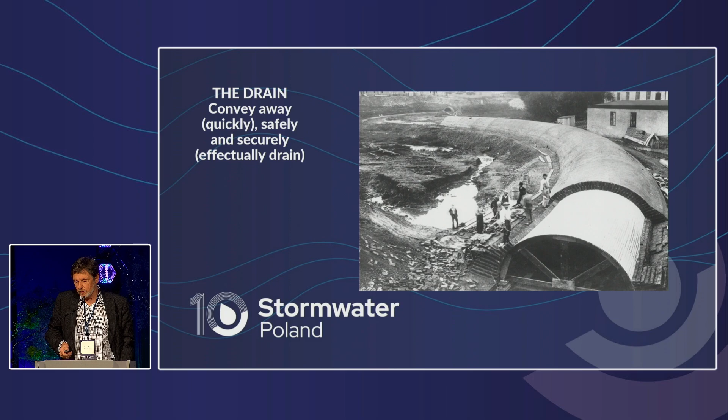Stormwater is a Cinderella in the urbanism landscape. Most politicians are only interested in it when it causes problems. Increasingly so, but still, actual genuine attempts to tackle issues to do with stormwater are few and far between amongst our governments and even the institutions charged to manage it.

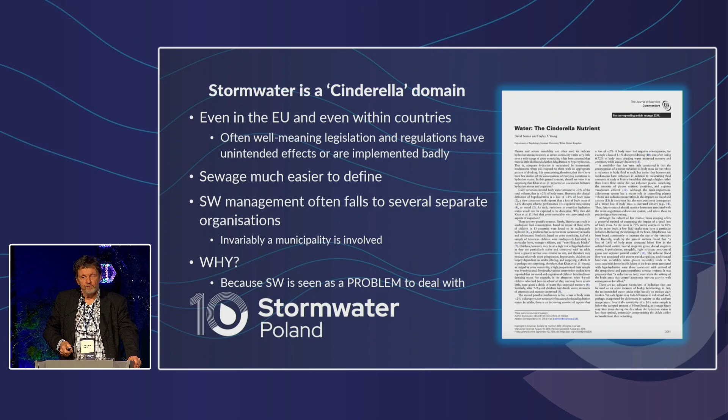Even within the EU, stormwater is not seen in the same light as river flooding. Sewage, of course, is much easier to define. It's heavily polluted, and stormwater is shared between different organizations in terms of its management. And it's very dependent on urban planning. So it's also seen as a problem rather than an opportunity.

So the journey we're all on, because we're here, stormwater is a minor consideration that we need somehow to raise up the agenda. And suddenly everyone's talking about nature-based systems. You see it everywhere, it's in documents all over the place. But we've still got our legacy of buried infrastructure. We cannot just abandon that, particularly in Europe. And the costs of maintaining it and adding to it, if we so desire, are prodigious.

So we have to move stormwater up the agenda, whether they like it or not, and present it to the governments and institutions as an opportunity. So we need a culture change.

One of the ways in which we need to change is to introduce an adaptive culture. That means trying things and changing. In the Netherlands, for example, the big coastal defense projects are very much about adaptive planning, about doing something, seeing how it goes, and then building on that. We need to try and do the same thing with surface water management.

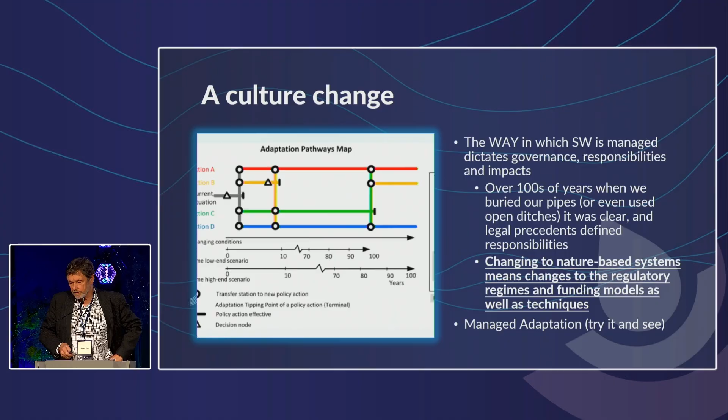Fortunately, blue-green infrastructure is easier to adapt than buried pipes. More of that later. So that physical, technical bit, we can understand. But changing the regulatory regimes, and we had a discussion of that just before lunch, is often one of the biggest obstacles. So what about designing our drainage?

Ulrich earlier showed a similar approach to this one, and this is in one of my co-authored publications on exceedance drainage. What we have are the lower volume events at the bottom in zone 1. We have our design events in zone 2, and we have exceedance events in zone 3. An exceedance event is an event above your design rainfall. In the UK, typically we design BGI systems for a 1-in-100-year event, so it would be something bigger than that. We've then got extreme rainfall.

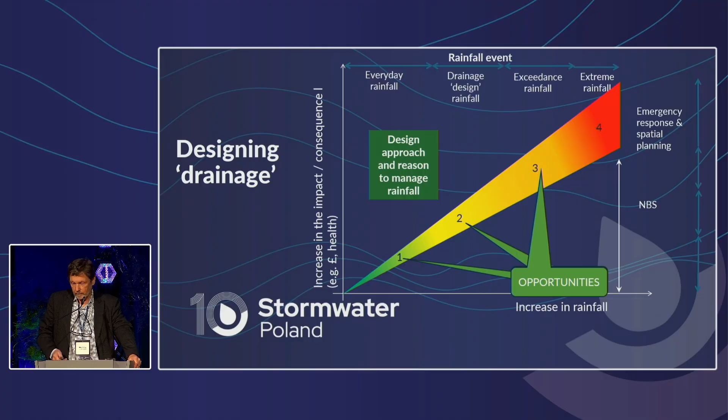In each of these zones, 1, 2, and 3, even when our nature-based system is exceeded, we can utilize opportunities for the surface water. And our resources fit very much in zone 1, where we would look at sequences of rainfall to take the opportunity.

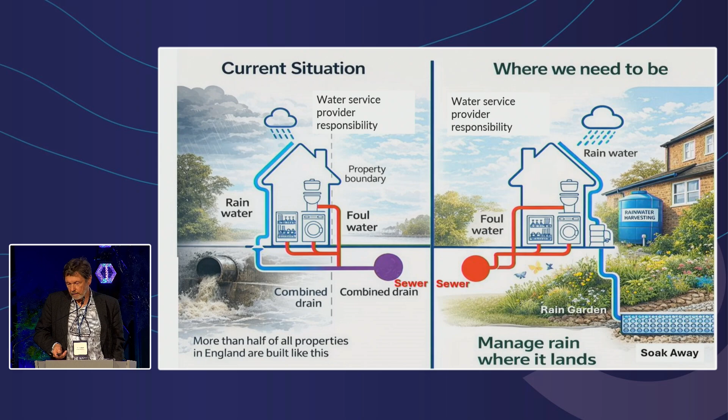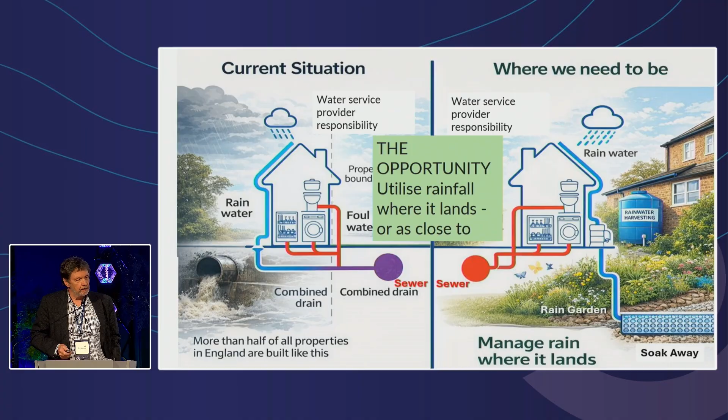Of course, it also goes back to individual properties. And again, we heard before lunch about developers and how developers are often reluctant to change to a system that would actually do with water what the opportunities allow us in terms of resources. And the opportunity, of course, is to utilize the rainfall where it lands, or as close to. So at one end we have that, a domestic system. We also heard about potential for grey water use before lunch.

I want to start really with a couple of slides of axioms. So initially, our planned approach should be to integrate our surface water systems with land use planning and across other systems. We understand that. To cope with climate change, take a managed adaptive approach, which I've already mentioned before, promoting flexibility and diversity of systems. Resilience is very much about diversity.

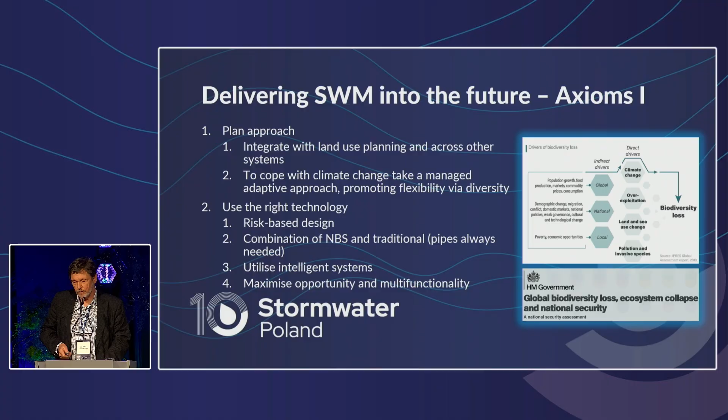Use the right technology in a risk-based approach, which I think we are doing, and a combination of nature-based systems and traditional pipes. We will always need traditional pipes. Utilize intelligent systems and maximize opportunity and multifunctionality.

And it's a cultural change. In my professional life of 60 years, it's been fellow professionals that I've had fights with more than anybody else.

We need to persuade many groups and make business cases, and there's more than one business case needed. Then we need evidence to show performance. Earlier we heard about the need for pilot projects. So we need to get to the point of selling it. We live in a neoliberal economic world, like it or not, and becoming more neoliberal by the day.

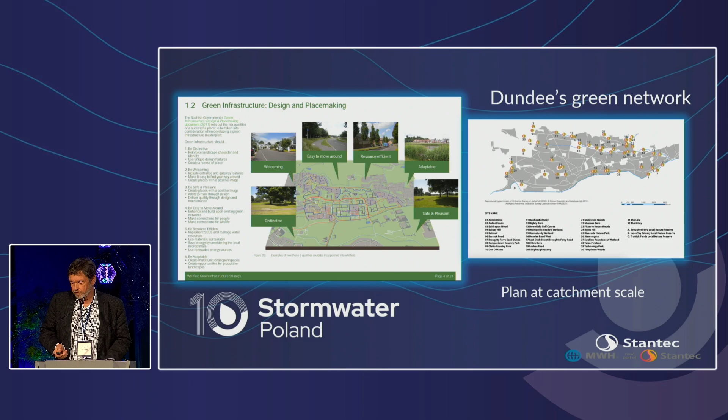So how do we sell this? Well, this is near me in Dundee, Scotland. If we're going to do this, and this is a multifunctional space, we do need the space to do it. How do we do this in dense urban areas? In Dundee, they've got a green network that's interconnected. That's the big plan: install BGI and make sure it's coherent within the planning framework.

So what I'm going to talk about now is economics. We've hardly touched on economics so far, making the business cases. I was involved in a European Interreg project called BEGIN, Blue-Green Infrastructure, which was all about the business case for blue-green infrastructure. And then we're going to touch on whether it is sustainable.

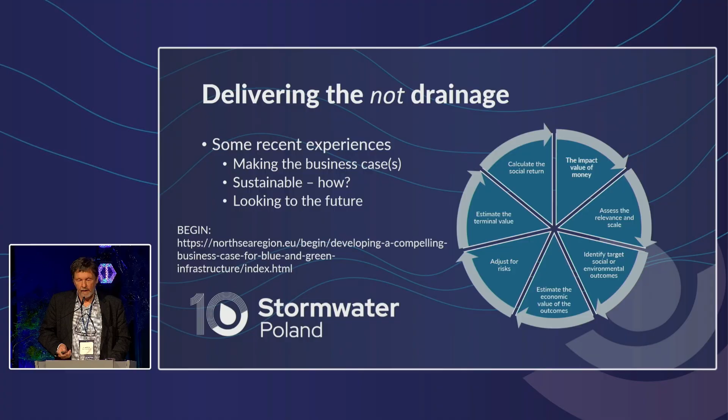If we'd gone back to before, ten years ago, a lot of people would have been talking about sustainability. That is a dirty word now. It's been dropped, people forget about it, but I'll come back to that.

So we need to make the business case and we need to look at cost-benefit analysis. And yes, it's only the Anglo-Saxons that are interested in cost-benefit analysis, as I've been told by the French, that it's only really us Brits that are obsessed with cost-benefit analysis. And that's what I'm going to talk about.

How do we value nature? These are a couple of projects I mentioned: BEGIN, and Enabling Water-Smart Communities, a British project that I was involved in last year. We actually talked to communities: how much more would you be willing to pay for your new house if it was in a green area? And people were willing to pay more.

They had other things on their mind about crime, for example. So obviously in the UK, crime is out of control. And the basis for this is ecosystem services and natural capital assessment.

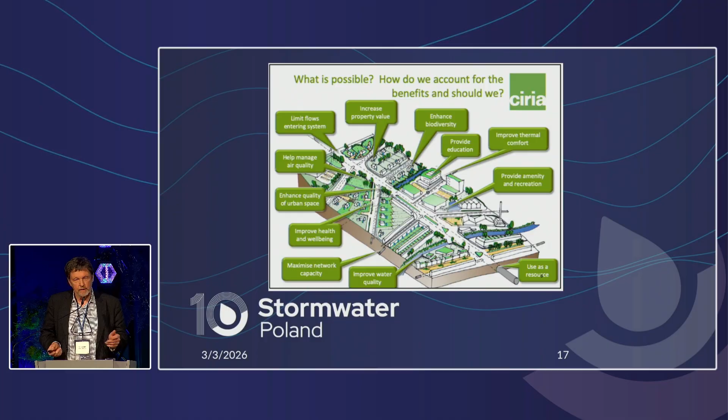There's a whole range of values here. We've heard earlier about increased property prices, obviously water resources, but there are other things like traffic calming. In the US, they build what they call bump outs - rain gardens on the sides of roads that also slow traffic.

So we're going to look at some of these and what they're worth. But before we do that, the first ever application of this concept in the UK was in London, and it was in an area of deprivation, and therefore investments gave a very good return.

The problem was flooding, and there was a local park, but it was flooding adjacent properties. It was decided to invest and look at the value of the benefits that might come from ecosystem services from investments. It was discovered that the benefits of investing £1 were £7, and 93% of the benefits were for cultural services.

So in the ecosystem services categories, there are 4 groups of benefits. Cultural services are far more to do with community value. And this was accepted by the British government as a justification for investment.

Philadelphia has been a path-finding city for doing this sort of stuff, with combined sewer overflow problems. They have approached this as a green city type approach, but not for the whole city. 50% of the combined sewer overflow problems were being tackled by LID, Low Impact Development, or BGI, and this has been underway now for some decades.

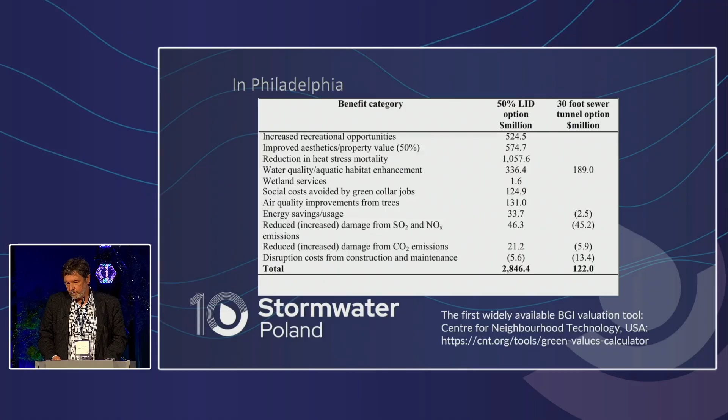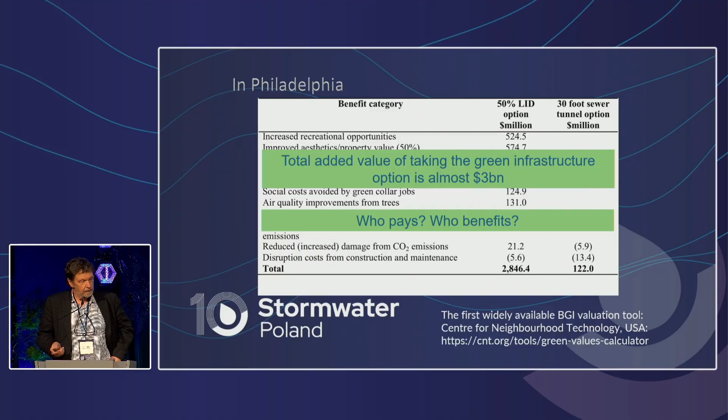And you end up with a total of $3 billion by using blue-green infrastructure as the added value. And all this added value went to the mayor and the mayor's office, because the mayor in Philadelphia was responsible for all of these services. So the justification was very high for this investment. I don't have the costs, but the question then is, who pays and who benefits? The people of Philadelphia are benefiting, the municipality is benefiting, and therefore they should pay.

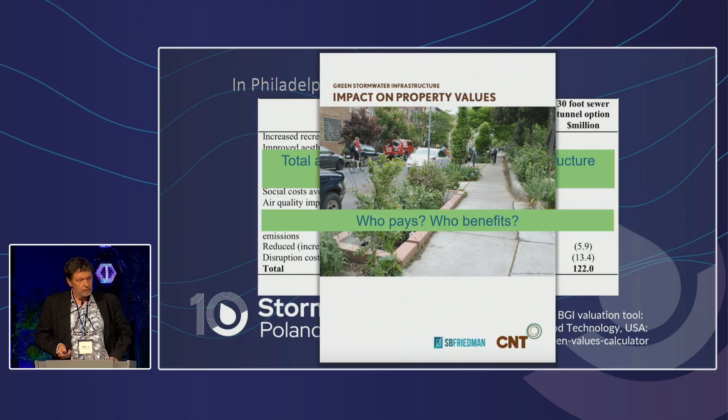And it was a tool developed by the Center for Neighborhood Technology in the US that was used to determine these benefits. Now, I'm the co-creator of the UK equivalent of this, a tool called BEST, Benefits of SUDS Tools. As you know, in the UK, they use the term SUDS, Sustainable Urban Drainage. They're not necessarily sustainable, as we'll see later. But this tool, BEST, puts monetary value on these various multifunctional benefits.

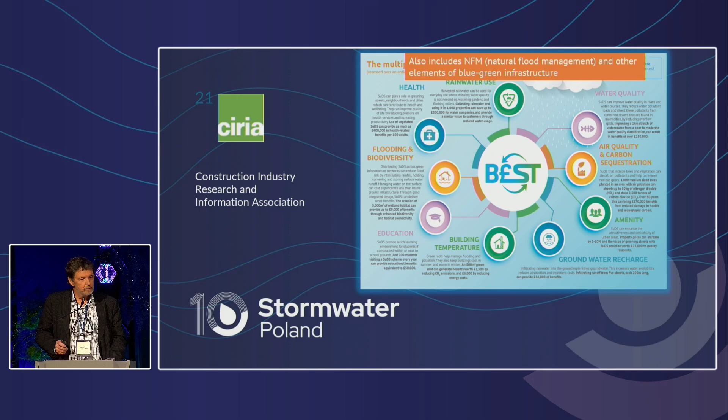So here we have air quality, pounds per tonne of pollutant reduced, amenity, primarily house price values, biodiversity and ecology, building temperature, carbon reduction, education, flooding, groundwater recharge, health. Health is often one of the big ones. Rainwater harvesting, recreation, treating of wastewater and water quality. All these we've monetized.

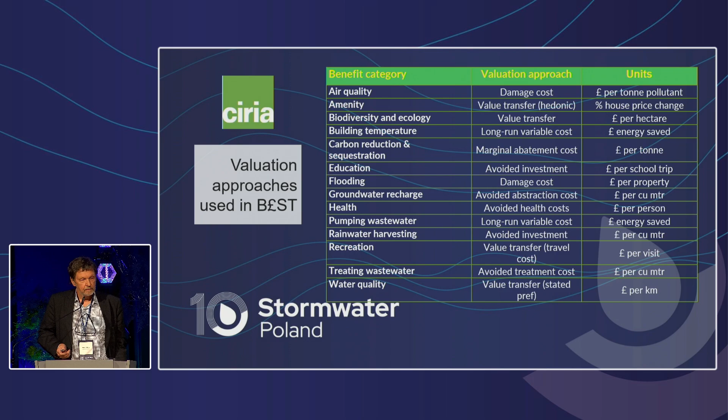So what are you planning? How will the infrastructure work? What will it change? How much will it change? What is the final outcome? And what are the benefits? For example, new park areas, planting and soil, quantity, quality, amenity, and this is proportionate to the size, number, and context. And I'm going to give you some examples.

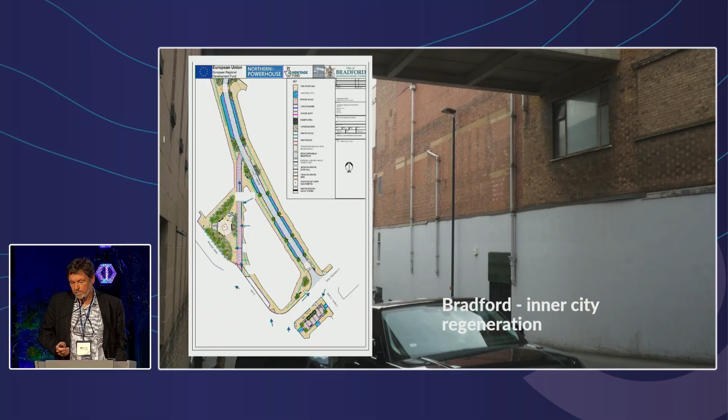The city of Bradford, which is a multicultural city, it's Cultural City of the Year in the UK at the moment. And it's an inner city area that they wanted to retrofit rain gardens. And this is what it looks like, very dense. And this is what the street rain gardens look like. And we were asked to look at the value of doing this.

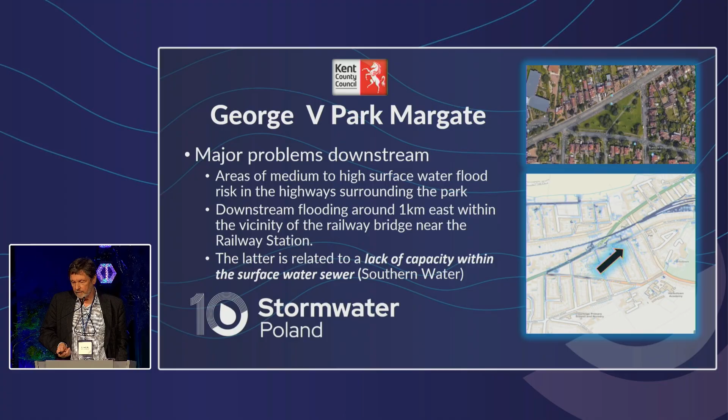George V Park, local flooding, significant to cause a lot of disruption, but also problems for people living there. Utilize the park by building BGI. And so we were taking a green space, but we were modifying it.

And this was part of another European project. So understanding that value, you say, well, these are a couple of small, one's a town project, one's one where there's a park already. Okay, sewer overflow problem. Some of the people here told me last night they'd lived and worked in Leeds, and this is a Leeds case study.

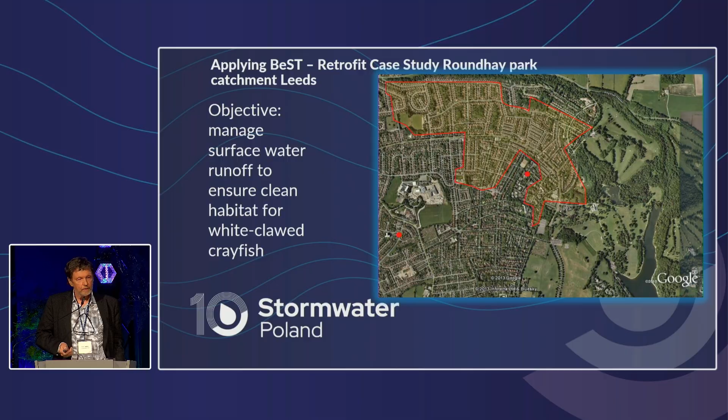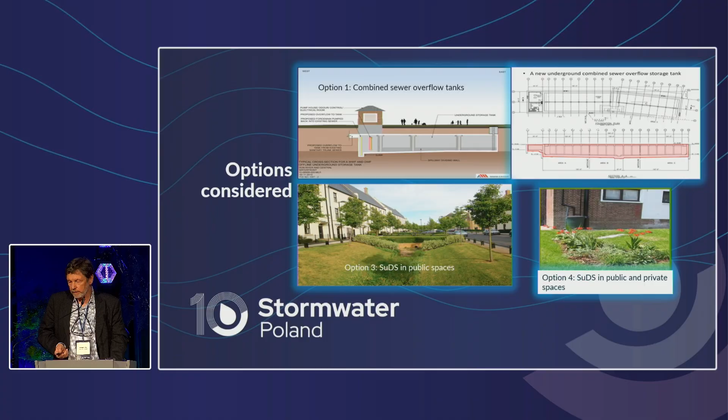And the objective was to manage surface water runoff to ensure clean habitat for white-clawed crayfish. So it's a water quality project. So what was possible? Combined sewer overflow storage tank before discharge, an excess-sized tank to manage flooding downstream as well, SUDs in public spaces and SUDs in public and private spaces. And I'm only going to look at one option, SUDs in public and private spaces.

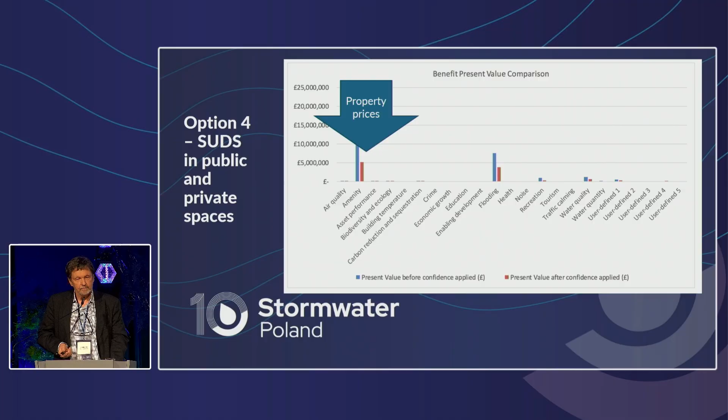The highest value was the elevation in property prices from retrofitting BGI. Water quality is a smaller benefit, and that was our objective. And if we look at the net present values, the green bars, they're all negative apart from SUDs in public spaces. But that's not the real issue with this case study. The real issue is that the costs of using BGI are 3 times the costs of building a tank.

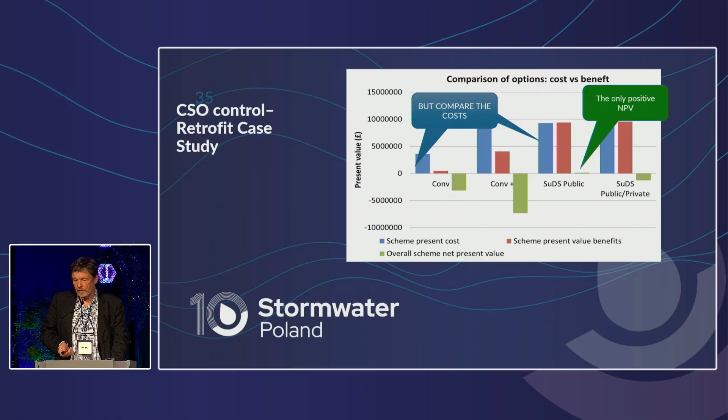Okay? So who should pay in terms of the costs of getting the added value from the BGI? And this is a private water company we're talking about in England. And despite the main objective to improve the river water quality, the main benefits are for amenity, property prices, and flood risk reduction.

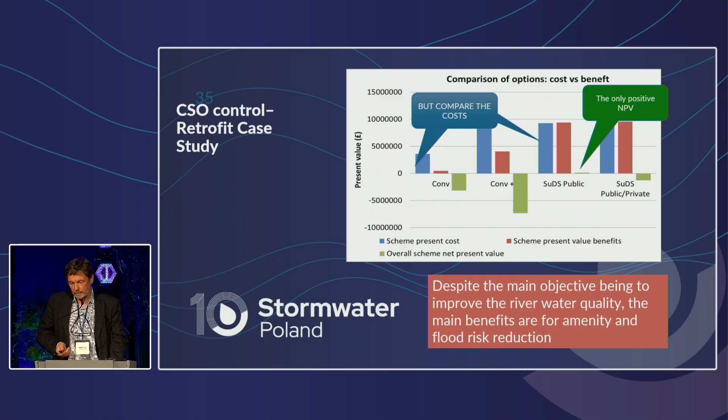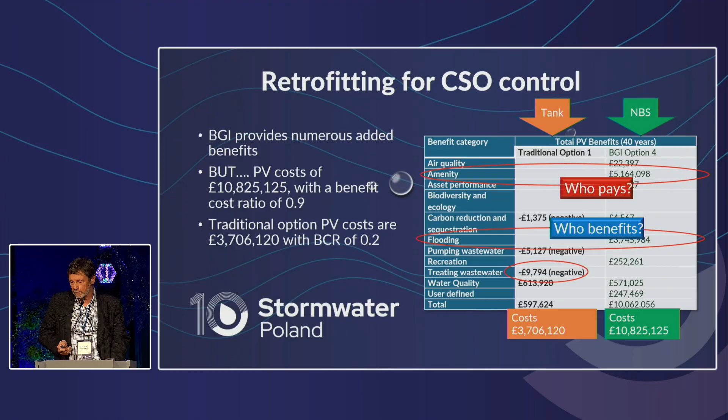And this is just some of the numbers, but I think I'm not going to have time really to go through that. The main point of this case study is that should the water company pay for added BGI benefits when it doesn't benefit as a service provider? So who benefits and who pays? And these tools are now enable us to ask the questions, who benefits and who pays?

And I said I was going to touch on sustainability assessment. So it's never been developed properly. There are a lot of guides on sustainability, but no one can quite agree on how to assess it.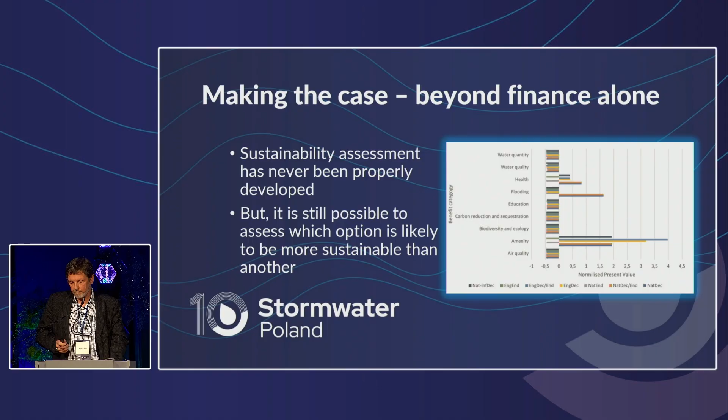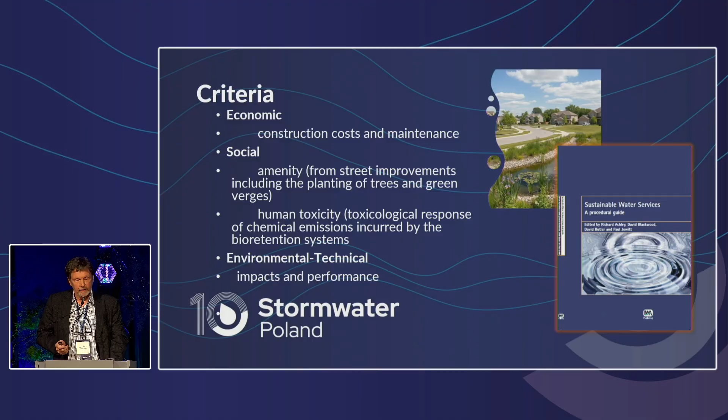But we can compare one option with another. So this is my book on sustainable water services, and the criteria cover economics, social, society, and environment. And this is a case study from Sweden, because I'm an adjunct professor in Luleå. And the question was, which rain garden is likely to be the more sustainable?

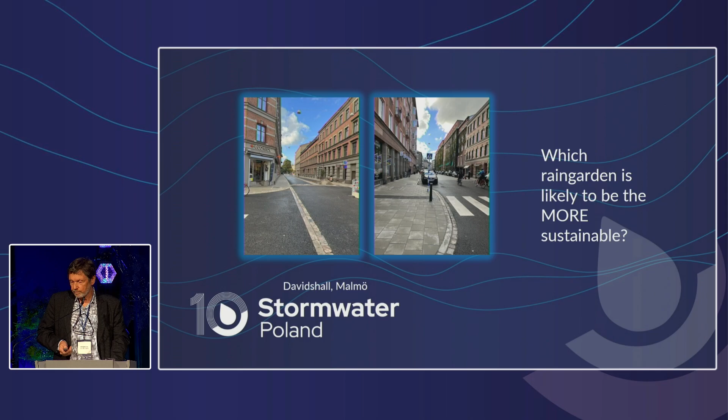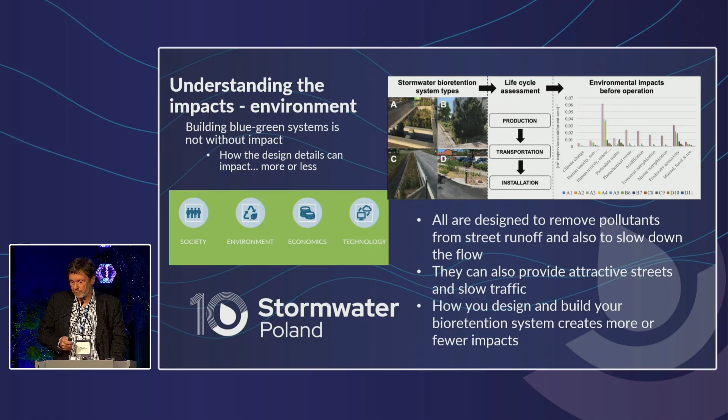I know you're using a lot of rain gardens, so we actually looked at 12 rain gardens of different types of design, all to the same results, all controlling water quality primarily. So it's pollutant removal, but of course they provide other benefits. I've mentioned the traffic control. So 12 of these with different shapes, some concrete, some with different filter material. Postdocs and PhD students worked on this with me, and there are journal papers published on all of this.

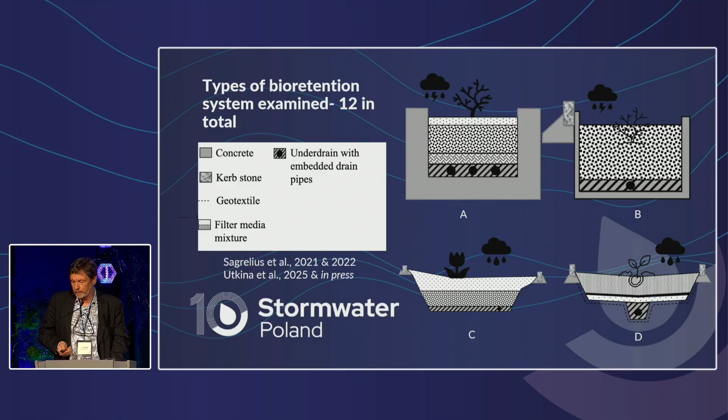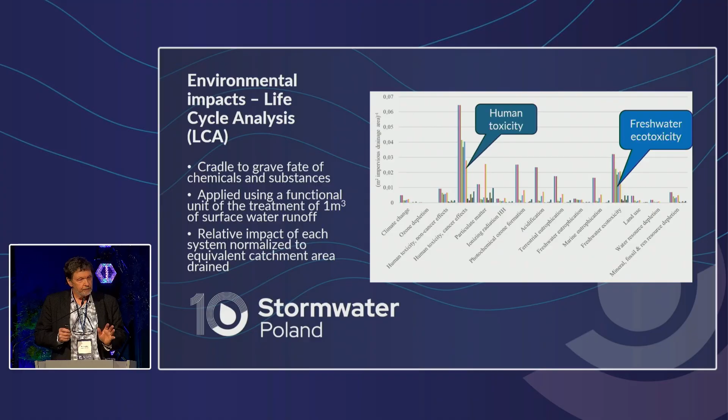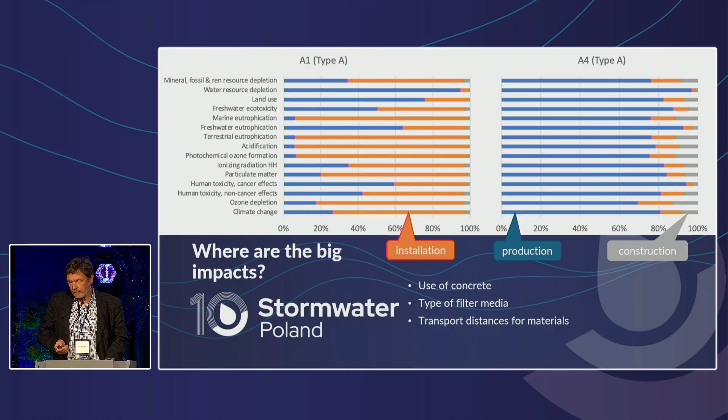So life cycle analysis, looking at the key components of the actual pollution caused by the materials used in the rain gardens, the concrete and the filter material in particular. And human toxicity, freshwater ecotoxicity. We don't have time to go through all the detail, but I'm just contrasting this with what I've shown you about the business case from the economics. And of course, there are big impacts from the installation, the production of the materials, and the construction. So concrete, filter material, transport distances, some of which had to be shipped into Sweden.

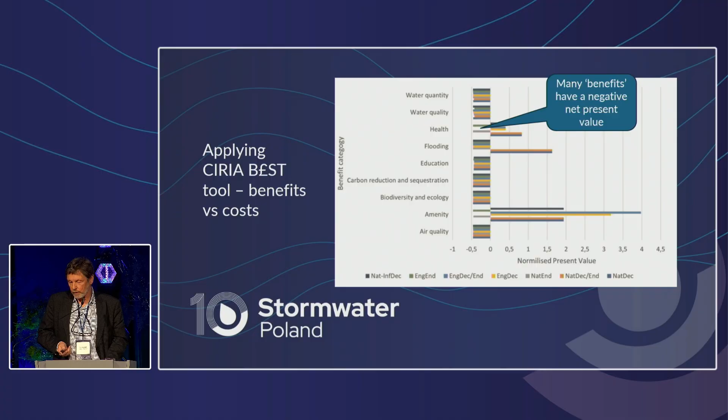And we applied the B£ST economic tool in the Swedish case. Many benefits actually are negative. In other words, the costs outweigh the benefits. And it's possible then to come up with a visual assessment of sustainability, comparing the different options. You can see all the numbers around there.

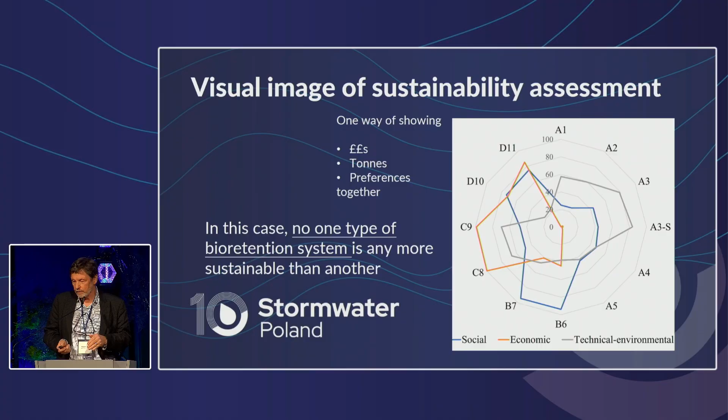And what we discovered was there was no one type of rain garden design that was any more sustainable than another. The problem is that you've got very many criteria, and some were better for some criteria and some were better for others. And we should be looking more to the future than we are.

It's no good just saying we're going to get uplifts to climate change on our rainfall, that the developments in this area are going to look like this over 25 years. There's a lot more things changing. Numbers of people, society's expectations, deterioration and maintenance needs. Who will do the maintenance in 25 years' time?

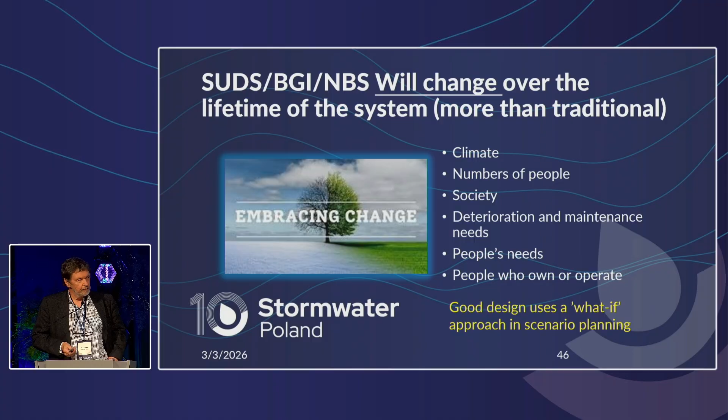And this is really important for our BGI systems. People's needs and who will own and operate the system. We should be using more scenario planning. I've been talking about this for years, but it isn't really getting through. And, as I said, managed adaptation pathways.

And this was another one of my PhD students, but this is West Garforth near Leeds. And this is a managed adaptation analysis of flooding, essentially, what, if, and then.

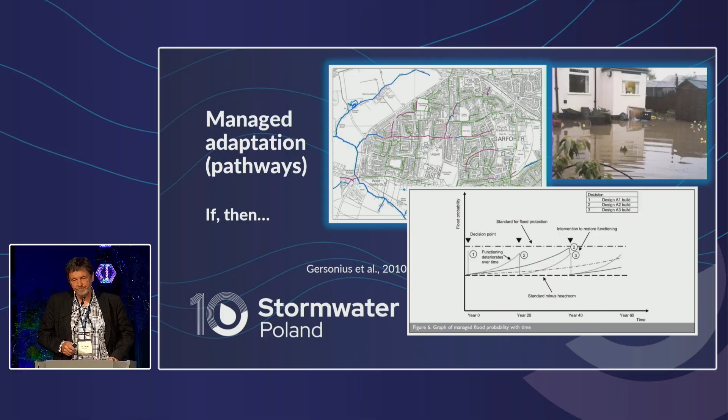But it's not just AI. Everyone in this room should be getting out there, working on your projects, putting your boots on, getting out there. AI will never replace you getting out there, standing in the mud and the rain.

Increase the need for cross-disciplinary delivery, operation and multifunctionality. AI will certainly do that. And many new opportunities will arise from adjacent sectors. A lot of what we do has come out of the electronics industry. Hundreds of years ago, when I started my research, we didn't have sensors. We didn't even have computers when I was a student. Yes, I used the slide rule. And all that has come about in my lifetime.

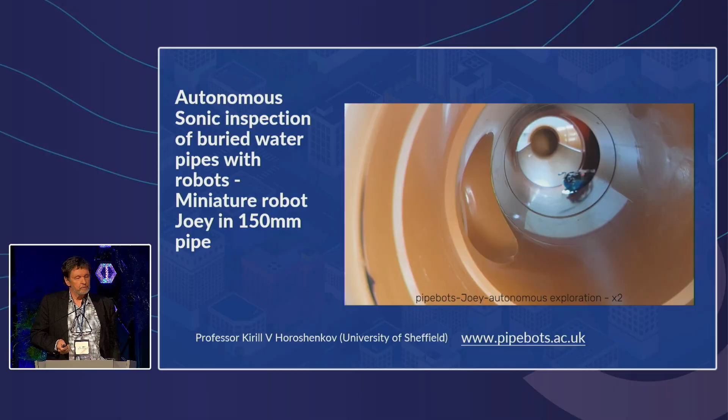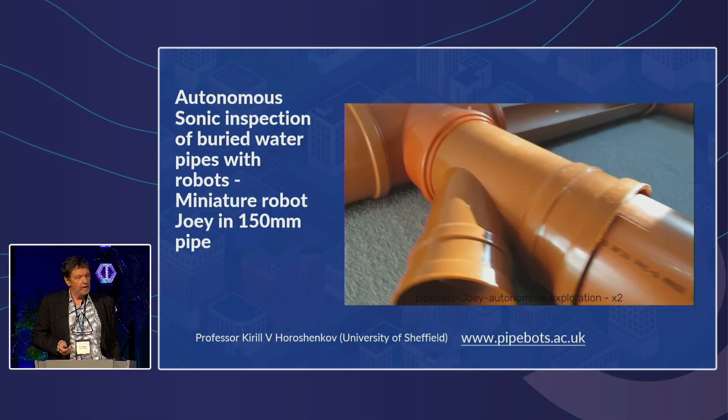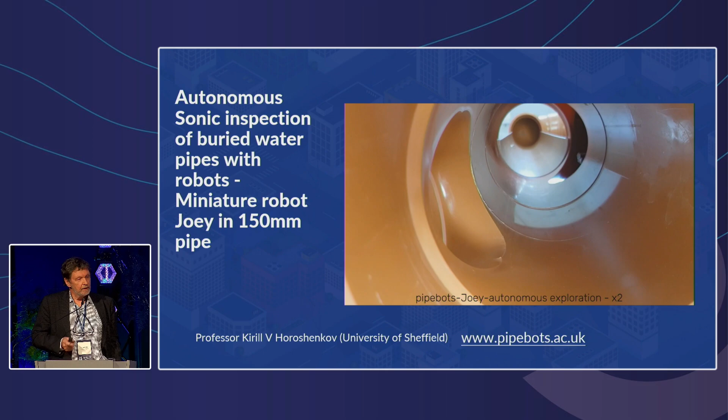And then finally, I'll leave you with this image from one of my Sheffield colleagues. They have a huge program on robotics in networks, in sewers, water mains, and what they've developed is autonomous robots. These robots spend their whole lives inside the pipe network, making their own decisions where they go and relaying back the condition that they find. This will, in your lifetime, become normal. Thank you.